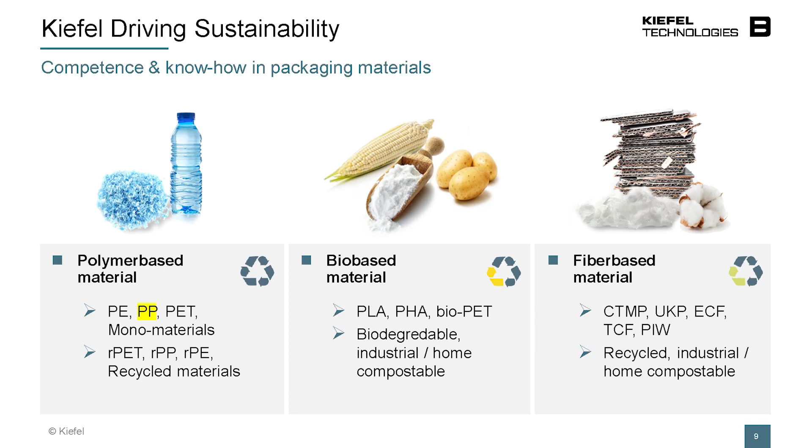Thomas Halles already touched these points, and this is where Kiefel wants to concentrate in the future: polymer-based materials, bio-based materials and fiber. For some of you, you have heard that Kiefel is going into fiber or went into fiber. For some of you, maybe it's new. So we will also learn about fiber.

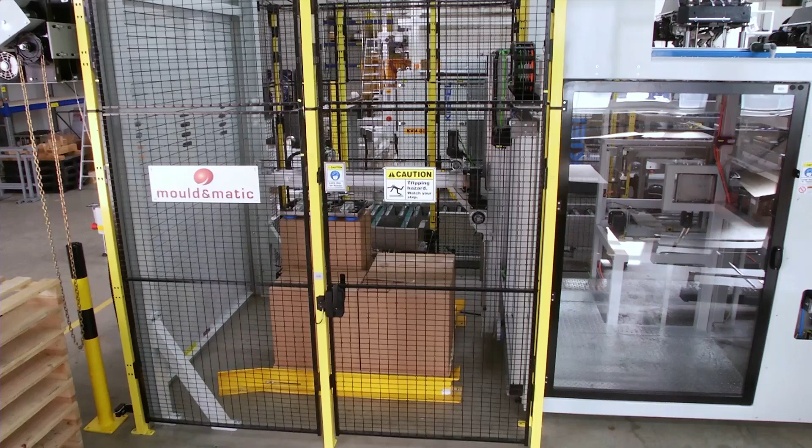So, I hope you enjoyed the short video showing the complete Kiefel turnkey system running a coffee capsule. And of course, you will have a question about is it really worth putting so much money in automation? I would say yes, I can answer that question, but of course, for every customer, you have to do your own return on investment calculation.

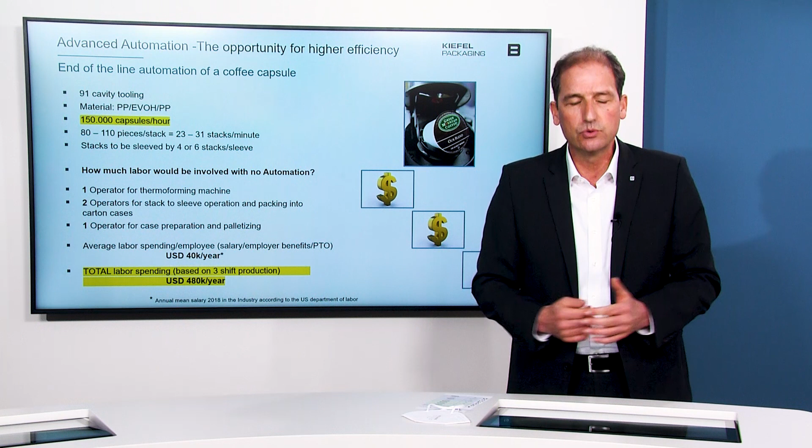This shows you an example. It's a 91 up cavity tool running 150,000 capsules an hour. And you would need about 4 additional operators in order to manually pack these products or these capsules. So overall, you are saving about 480,000, close to 500,000 US dollars with this investment.

So it is at least worthwhile looking into that solution to find out if it works for you or if it doesn't work. I'm sure it will work for you.

That was an example for a PP product. Now I want to touch PLA. PLA is a material that is around in the plastics industries for at least 20 years, I would say. Is it very popular in terms of volume? Probably no, but it is a very interesting material for certain applications. And looking into sustainability, you have to think about PLA and at least check if it is the best solution for your product.

Kiefel has done a project last year where we realized a cup line for a PLA cup, a drinking cup, rim-rolled drinking cup, 1 diameter and 5 different heights. So from 9 ounce to 24 ounce.

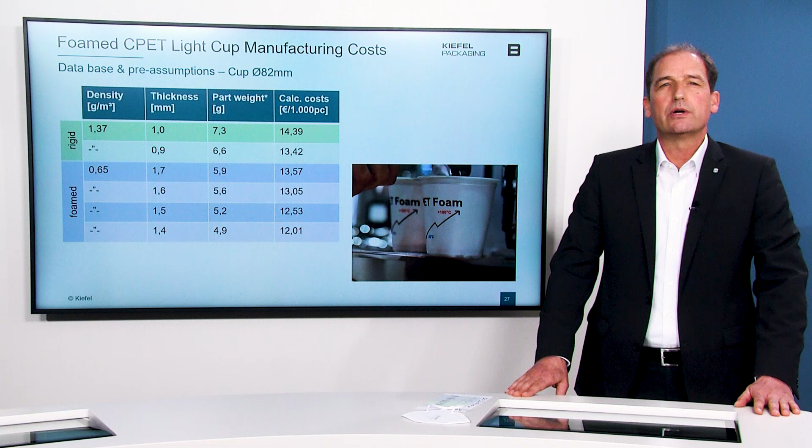I have calculated the costs for 1,000 pieces. And you can see clearly that from a film thickness of 1.6 millimeter, the foamed CPET makes most sense.

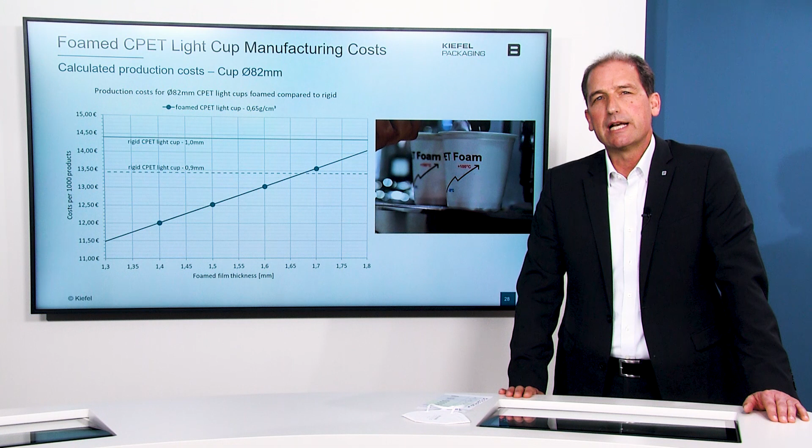Another slide also showing this. You can see the line where the foamed CPET is less expensive, and the more you minimize the width of that material, the more challenges it is getting.

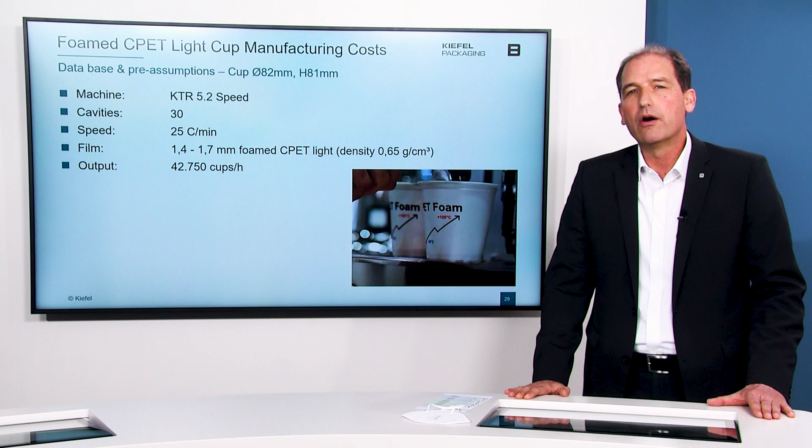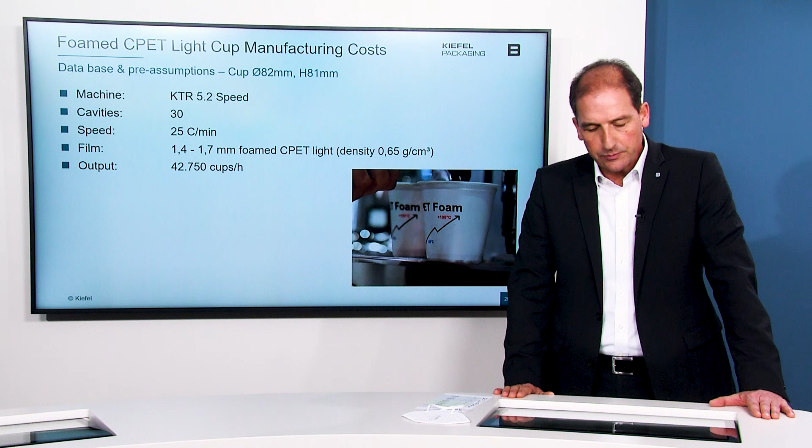What is the machine solution for that? We used the KTR 5.2 Speed machine in that case, with 30 cavities possible for that diameter, running 25 cycles. The 25 cycles are limited by the crystallization process, and there is no chance to go much faster. But the output of 42,000, almost 43,000, is I would say acceptable. Another product we have done, a different design, makes it a little bit more rigid with the design on the outside. In this case, a little bit bigger, 21 cavities, and the output is around 30,000.

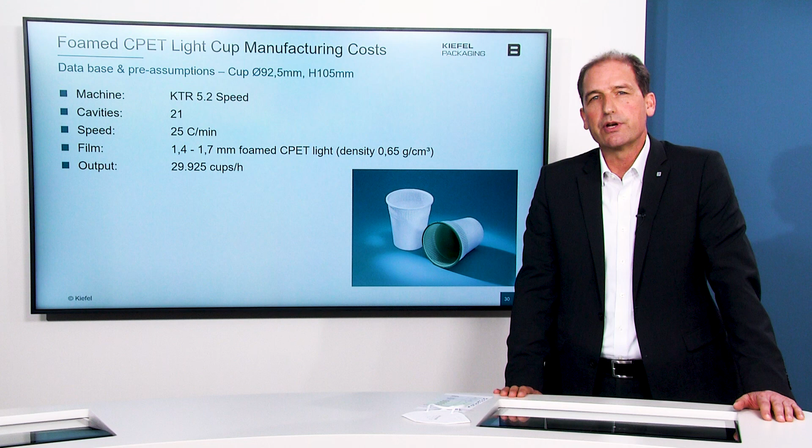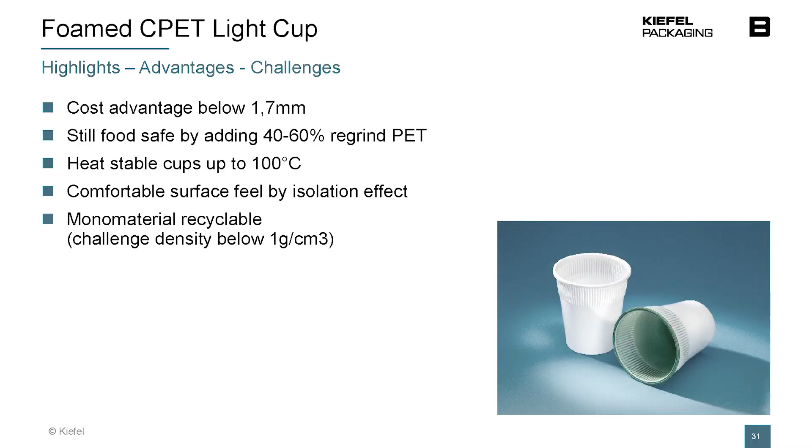And of course, there are highlights, advantages, and challenges in this product, I have to say. The biggest challenge, I would say, is getting to a film thickness where this material really makes sense and is less expensive than rigid PET.

It is a challenge to use PET regrind, but what we have seen so far, it is possible to go as high as 60%. A real advantage of that cup is that you can fill up hot coffee, hot tea, hot materials, and the feel outside is great. It is almost cold, and it has a really nice touch to it.

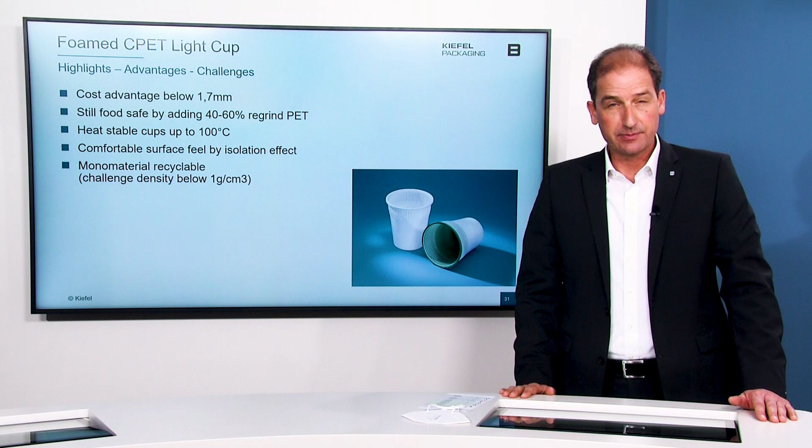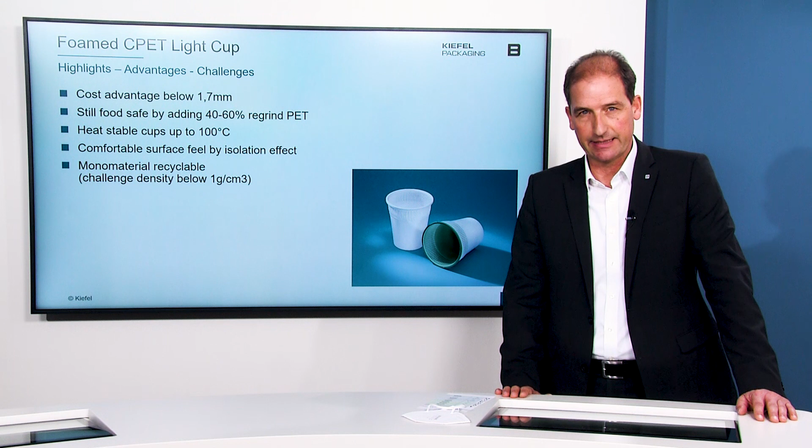And again, as we talk about sustainability, this is a monomaterial and can be recycled. The challenge in recycling, of course, is density. But there will be solutions in the future.

So, I mentioned before the KTR 5.2 Speed machine. Let's have a look at a nice video and see what this machine is all about. Yeah, let's have a look at the video.

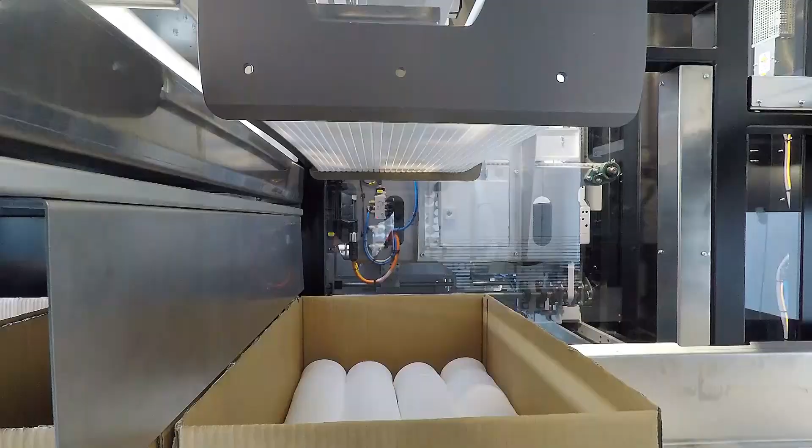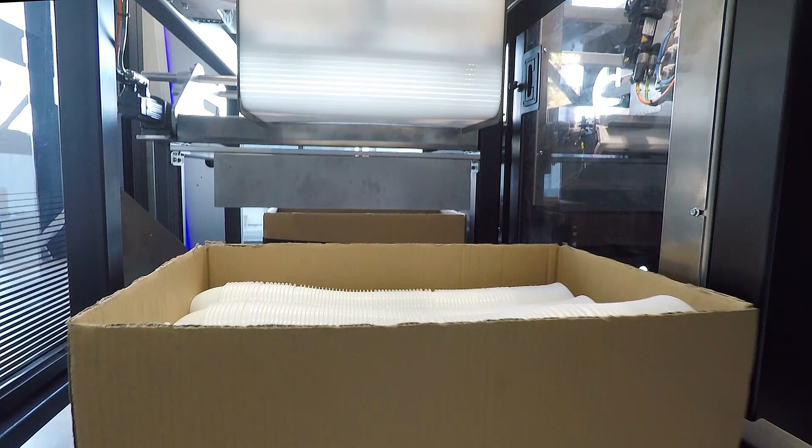Yeah, that was a nice machine, right?

I guess you could realize that there is no blue color anymore. So we have a new design for the .2 generation on the KTR side and also on the KMD side. KMD we will see later.

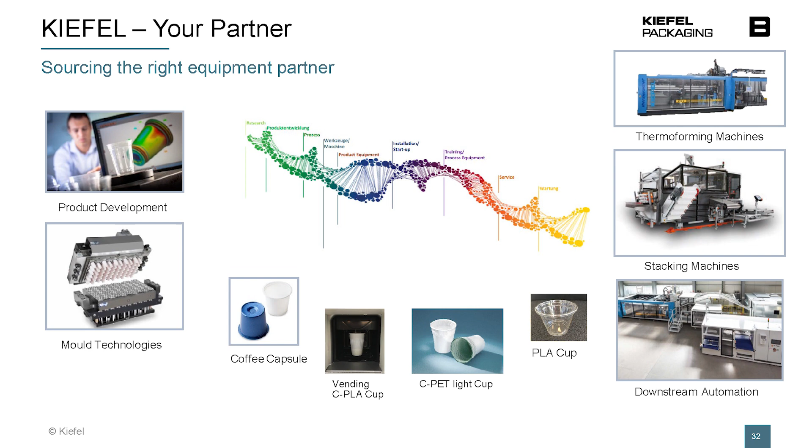And a real highlight on the .2 generation is the new HMI. For details, get in contact with us and we will look into that with you together and find out what you need and what we can offer.

So, at the end, I would like to summarize what Kiefel can offer. I started my presentation with a lot of changes. I think right now Kiefel has developed into a turnkey provider, and as you can see with this picture, we can offer tooling, we can offer machines, we can offer automation.

So for all kinds of different products, which are, if we talk about coffee capsules, not easy to make. If we talk about other products like the PLA cup, it's also not easy to process. So we are able to help you. And I would really ask you to get in touch with us and discuss the project and go deep into the technology and the solutions we can offer.

I also have to mention that we are still open. Kiefel will also offer a tool to a non-Kiefel-made machine. We will also offer automation for any kind of thermoformer in the field. So we are still open. We love to make turnkey, but we also can offer single tools, single automation, whatever is required.

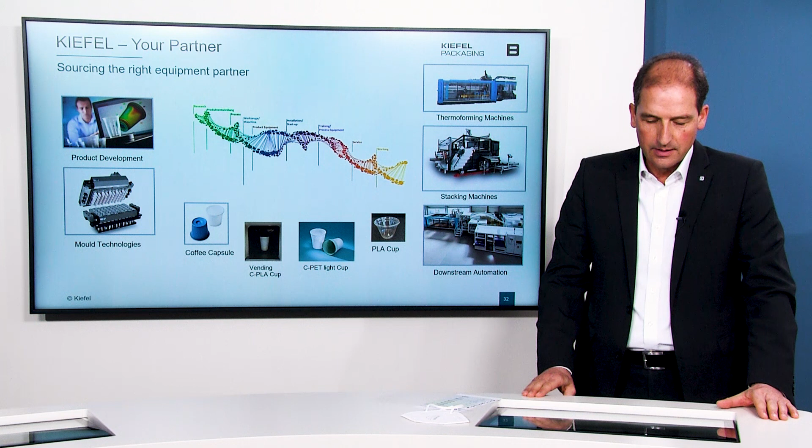So now it's time to welcome Alex, my colleague. Hello, Thomas. Hello, thank you Alex. Good to see you. Very nice presentation. Thank you. Congratulations. Thank you. Thanks.

Thank you very much. Thank you, Thomas. Thank you, Thomas.

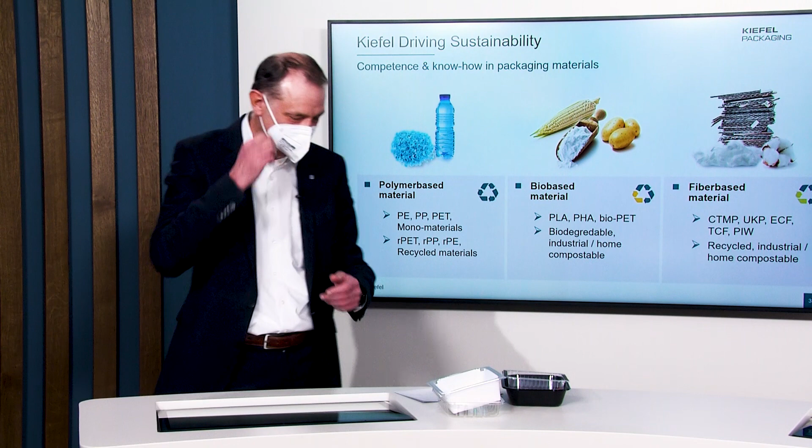Yes, ladies and gentlemen, good morning and welcome to our webinar. My pleasure today is to talk about some trends and innovations in the packaging field at Kiefel, especially dedicated to our steel rule cutting machines, our KMD series.

In one of our last webinars, I was talking about Bob the Builder with his famous 'Yes, we can' phrase. Today I have chosen Charles Boss Kettering. He was, well, the colleagues from the United States know him far better than me. A US-American scientist and also businessman working with General Motors, holder of 186 patents. And well, what he said, if you have always done it that way, it is probably wrong, something that I would agree on. And another interesting phrase is, my interest is in the future because I'm going to spend the rest of my life there. And with this phrase, I completely agree.

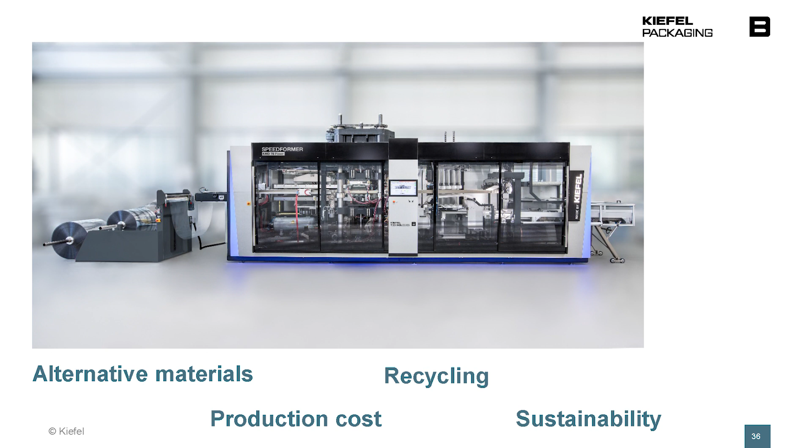And I think nowadays, every day more people are aware of this, and this is also driving the latest discussions if we take a look into the thermoforming business. As Thomas mentioned already on his slides, we have alternative materials, we have recycling, we have sustainability, and a traditional topic as well, like production costs. Currently we also have this pandemic COVID-19 issue on top.

This is the opportunity to say sorry for my haircut. It's been quite a while, 3 months ago.

Sorry for that. So how can we handle these topics? Let me give you some ideas about that, what it means in detail. For instance, the target of retailers and brand owners is that packaging should be recyclable, reusable, or compostable.

So I picked out some examples, like Aldi in Germany, Lidl the same, gradually reducing the use of plastic material in the packaging. Kaufland's packaging of meat from self-service should become a box just lined with a thin plastic foil.

On top of that, we have bans. Thomas was talking about the ban of EPS, so we have to look for alternatives to the foamed polystyrene. We have in different countries, in different regions even, laws requiring products that are banned or that should be completely made out of recycled material or with a certain amount of recycled material. So it is a challenge nowadays to fulfill all those requirements, and it's different in every part of the world.

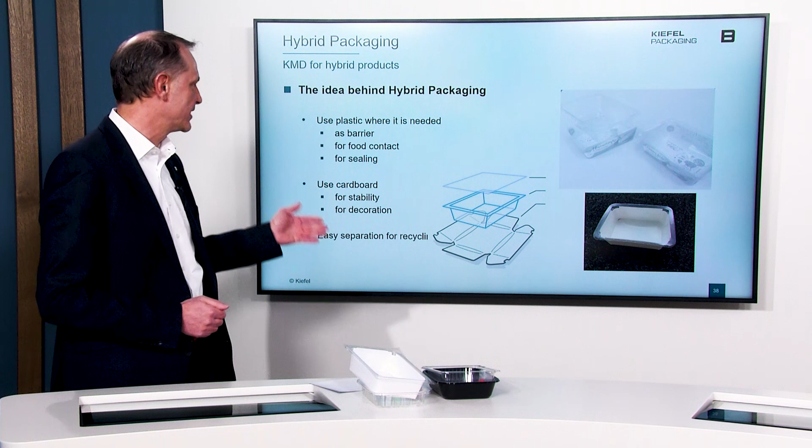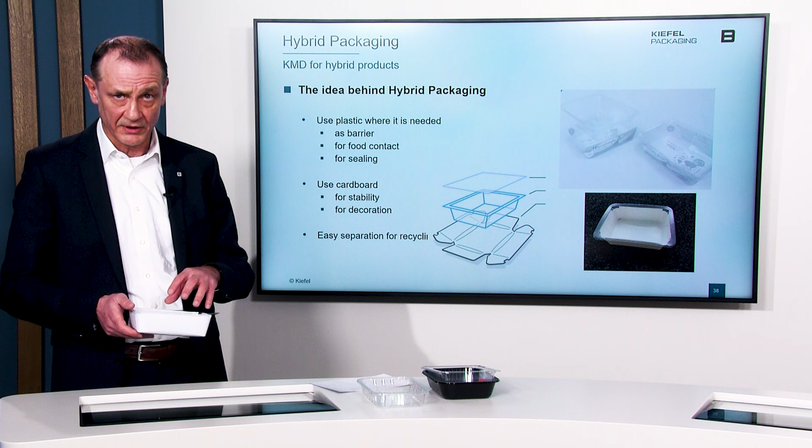One idea is the hybrid packaging. Kaufland, for instance, uses this kind of product. The idea behind it is to use the plastic just where it is needed, as a barrier for food contact and for sealing, with the cardboard outside for stability of the product and for decoration. The idea is to have the possibility to easily separate the plastic part from the cardboard and put it into different boxes or systems for recyclability.

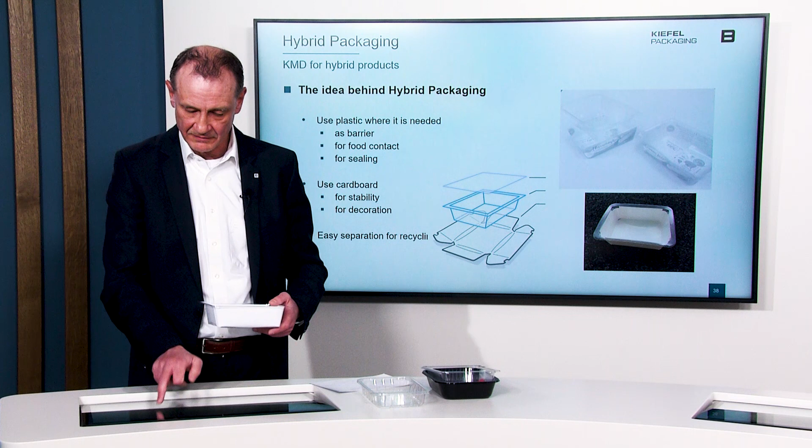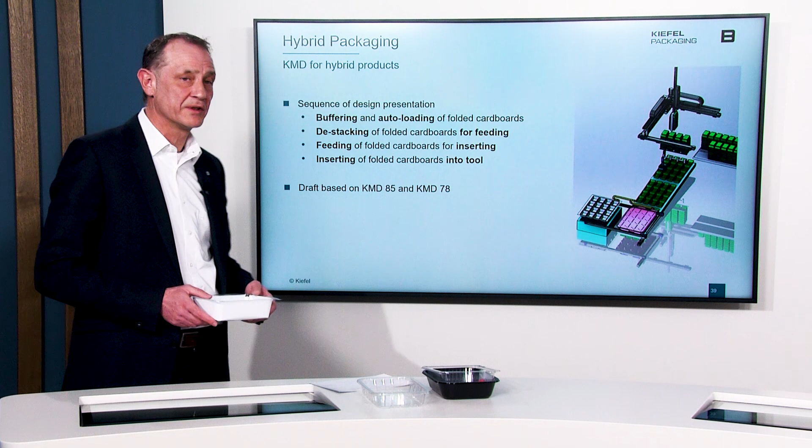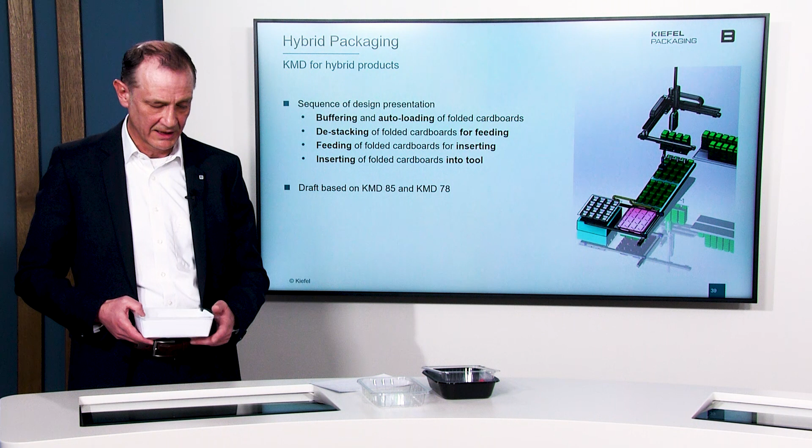How does it work? This picture shows the idea to buffer and autoload the folded cardboards, destacking them for feeding, for inserting and loading them into the lower tool of the thermoforming station. This draft is based on and available for our machines KMD 78 and KMD 85 size.

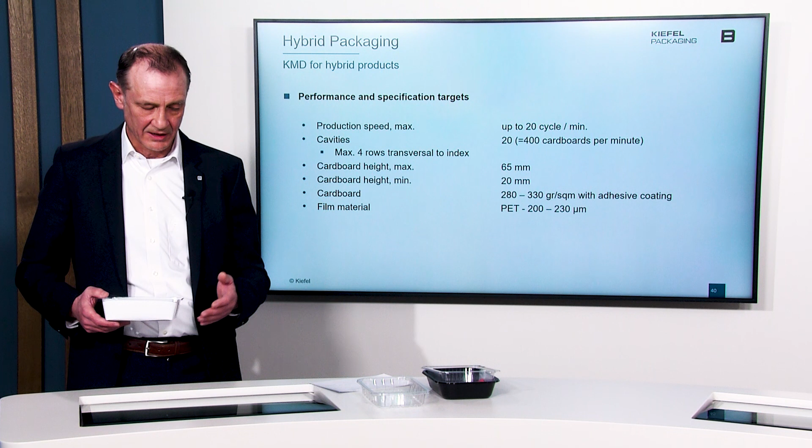Some ideas about the performance: production speed maximum up to 20 cycles per minute, 400 cardboard and 20 cavities per minute, 4 rows maximum transversally, and the idea is to use PET. For PP, it still has to be determined.

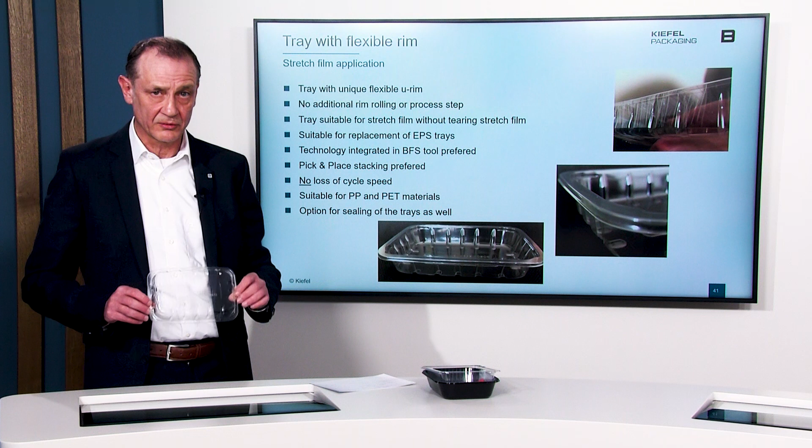Another product showing an alternative to EPS products, typically for the packing of chicken, fish, or meat, is the so-called flex rim design of a tray. I hope you can see it on the pictures as well. It is a traditional forming and trimming process in the same station, our so-called BFS system, a special tool developed by our colleagues from Kiefel Packaging in the Netherlands. The flex rim technology is integrated into the tool, so existing machines can be used.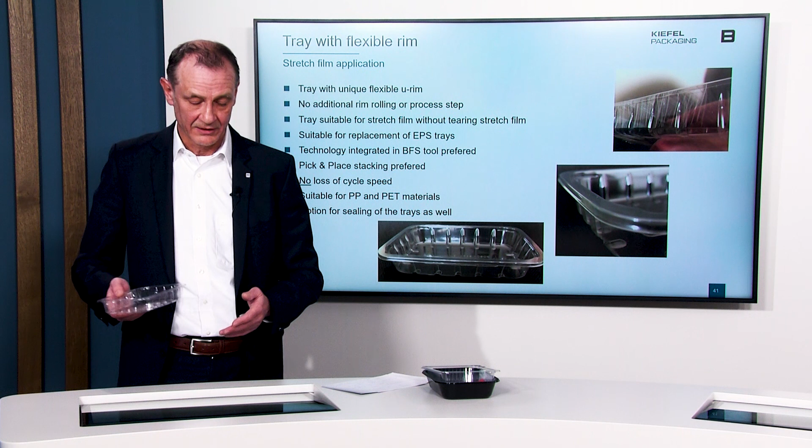Pick and place is preferred for the stacking of the product. The cycle time is quite nice, so you have no loss of cycle time compared to a classical rim design of the product. It's suitable for polypropylene and for PET materials as well, with an option for sealing available, of course. So a nice idea to replace EPS.

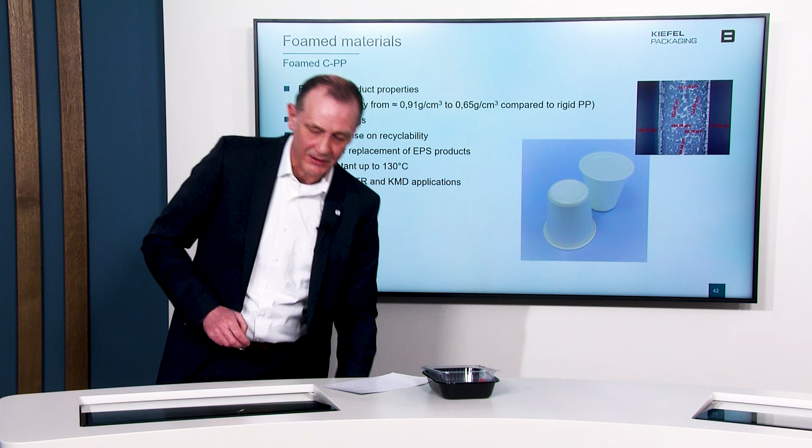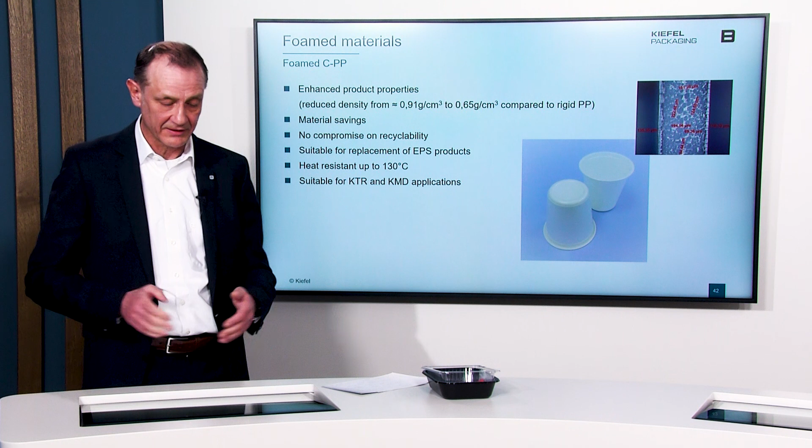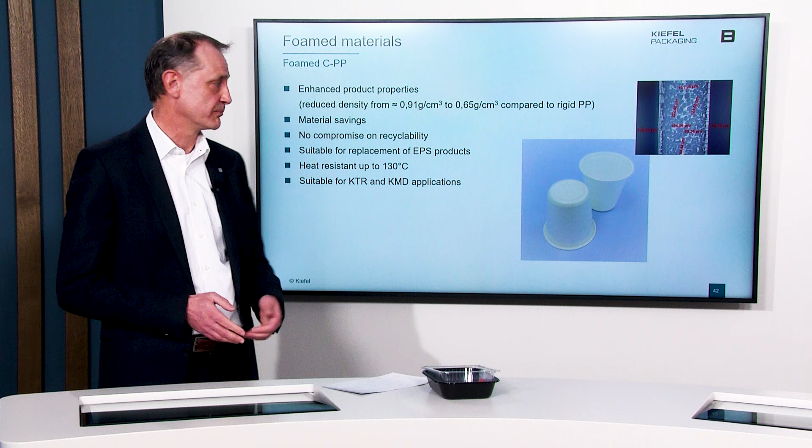Thomas was talking about some kinds of materials like foamed PET, foamed CPET. To complete this, I would also like to talk about foamed PP with a different density, reducing it from 0.91 to 0.65 compared to a rigid polypropylene. The idea behind this is very simple: it's material saving, to reduce the weight, and this is what the retailers are talking about, to reduce the usage or the weight of the plastic packaging. This fulfills that perfectly.

And by the way, it's heat resistant up to 130 degrees centigrade, suitable for KTR and also for KMD applications if needed.

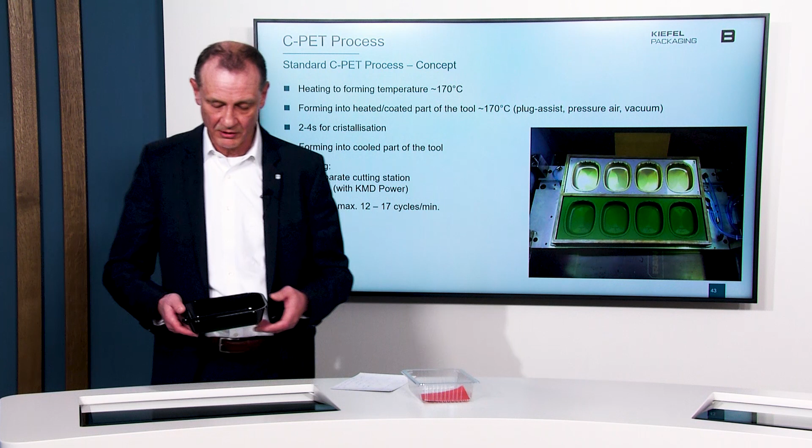Next topic I want to talk to you about is the CPET process. CPET is a very well-known product, typically used for ready meals, pizza trays, and also for cake, for instance. You can put this product into a classical oven, and it is heat resistant up to 200 degrees centigrade. I would like to share a picture with you showing the typical process with a divided tool, so classically you have a divided forming area.

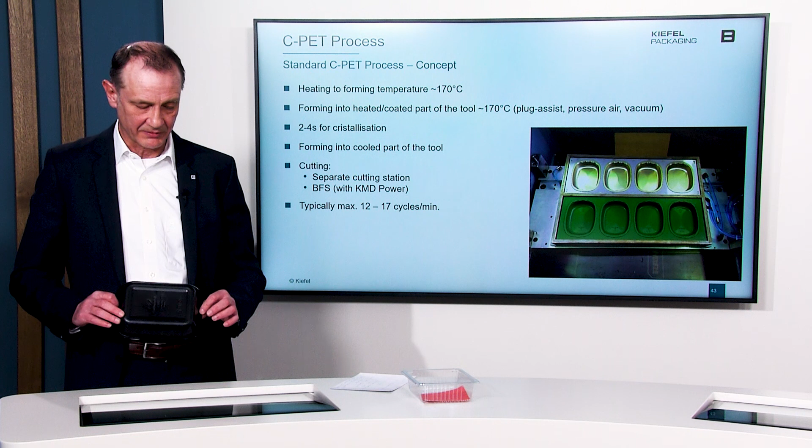The first part of the tool is hot, something like 170 degrees, and the second part is cold, or cool. In this combined tool we are typically forming CPET products, and the production time is 12 to 17 cycles per minute, which is not so fast, but for the crystallization it was so far not possible to do it in a different way.

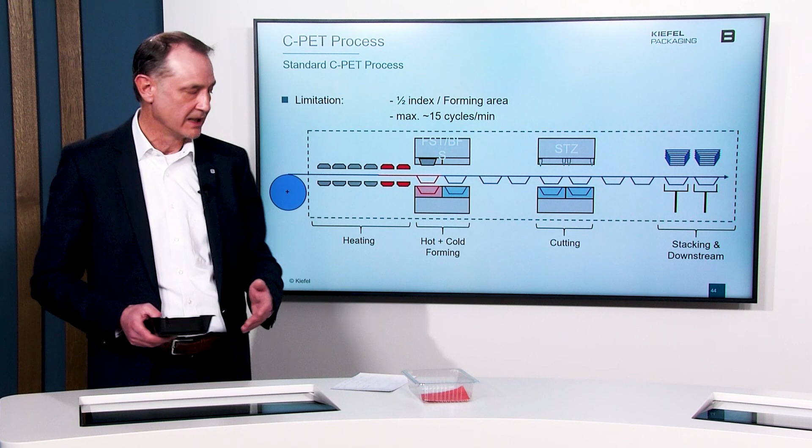This is a picture showing this process as described already, so just half of the forming area is available, and then the cutting and the stacking.

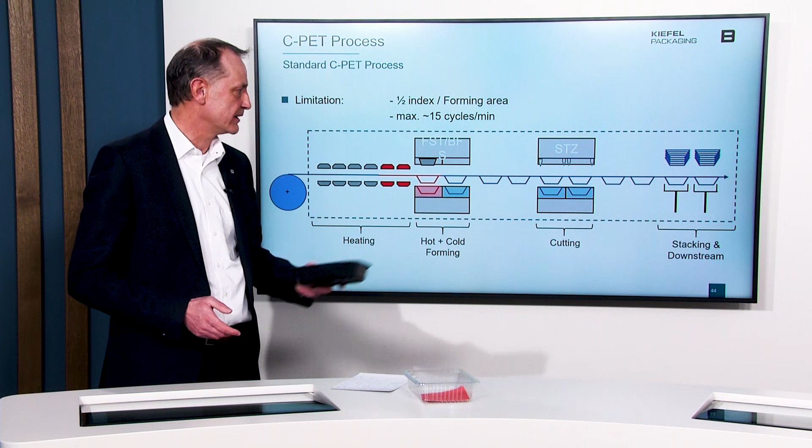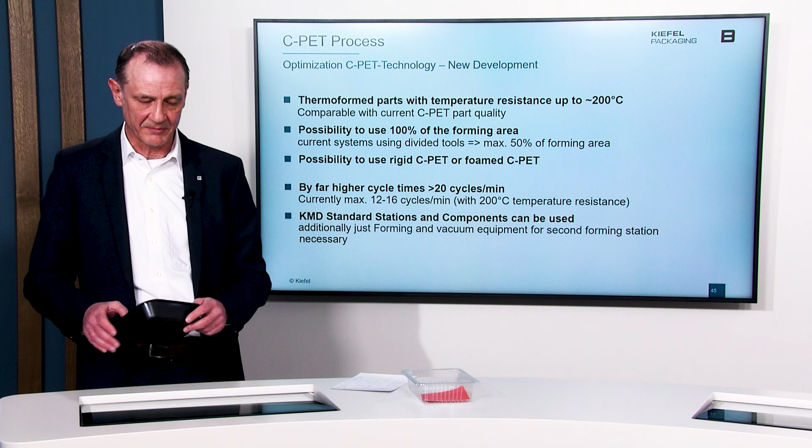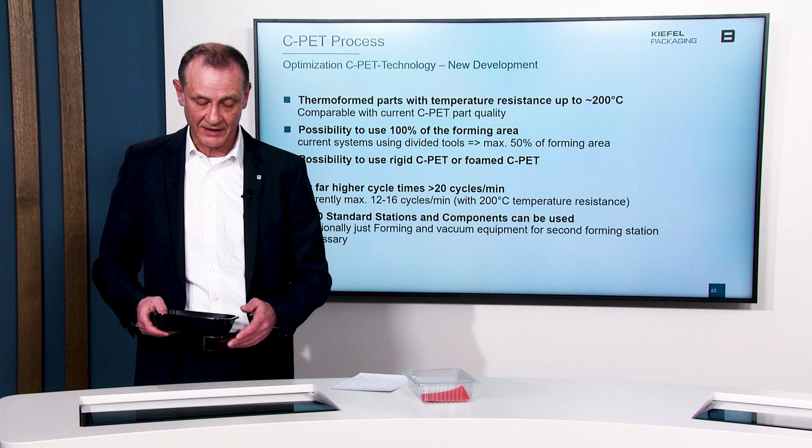Currently Kiefel is working on a completely new development, a new process for CPET, with the possibility to use 100% of the forming area and to have a typical classical machine configuration with 2 BFS stations to drastically increase the output of the CPET products out of the machine. So we are talking about cycle times higher than 20.

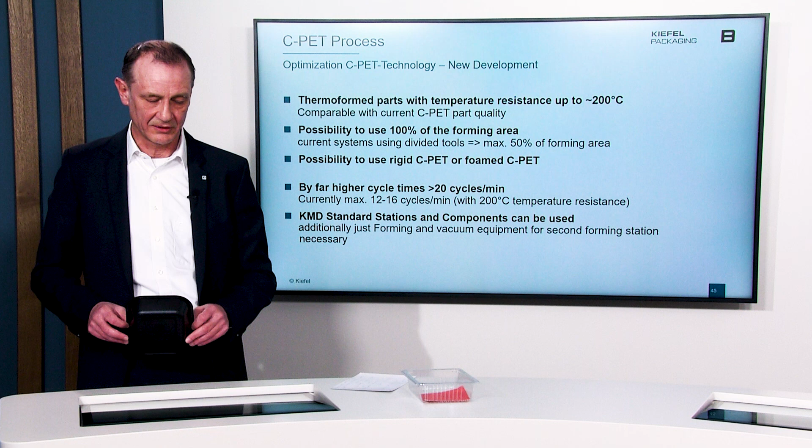Currently, as I said, 12 to 16. And all standard components of a KMD can be used. I do not want to show more technical details, but feel free to contact and ask us, and let's talk about CPET.

It's a fully integrated solution. The pads or the setting of the padder can be done via the main HMI of the KMD machine. It's very powerful, so you can operate the KMD with up to 40 cycles per minute. And it's one master roll, so we have the transversal cut, the cross cut, splicing, and an optimum of roll utilization.

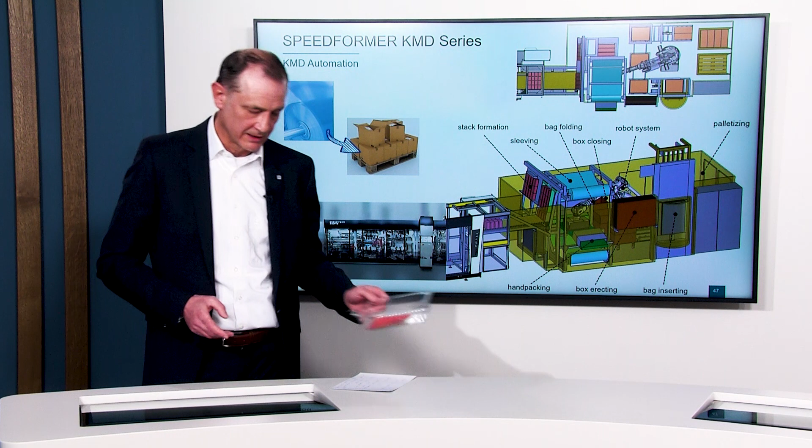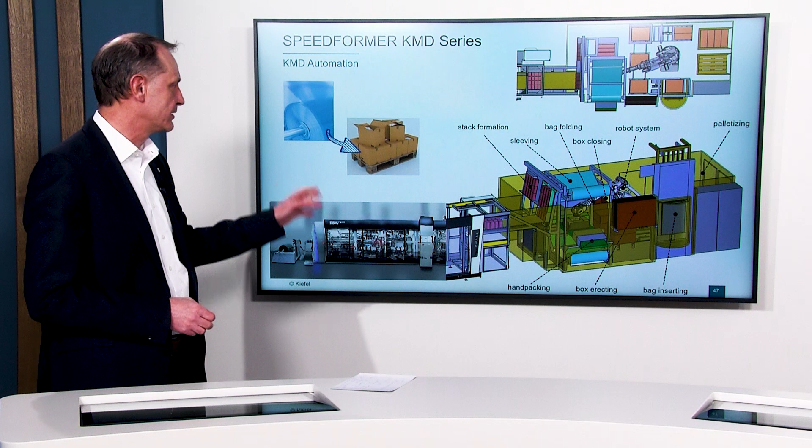To finish this automation topic, this is something developed together with our colleagues from Kiefel Packaging in Austria. It is an automation system. This picture shows a little bit the idea behind it, as Thomas mentioned, to reduce the number of operators, to have a modular system with the possibility to have a stack formation, to add a sleever, a bag folding, box closing, robot system, palletizing. So all this is available.

The idea is to have this in a kind of modular system and to choose what is necessary for your production and to fulfill completely your needs. So automation is always something we have to watch in detail. Please feel free to contact us, ask us, and we are happy to help you.

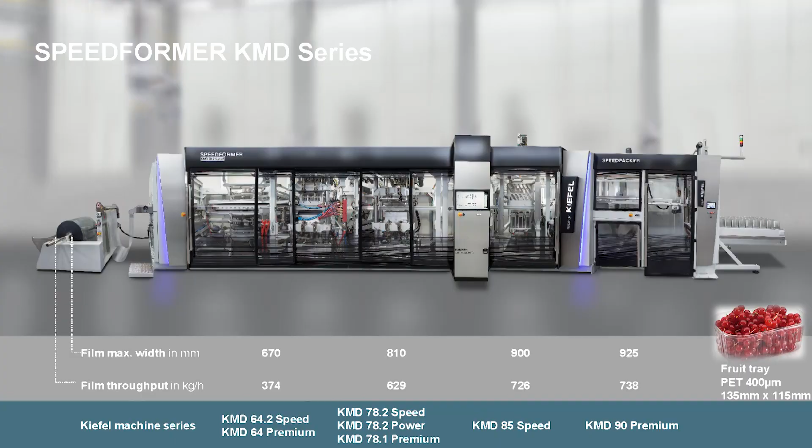My last slide is to give you an overview about the Kiefel portfolio of our KMD machines. So the different film widths, the different machine models, and I added, based on a fruit tray made out of PET, 400 microns, the machine capacity. For instance, KMD 78 machine size, more than 600 kilograms per hour is the throughput of the machine, which is quite an impressive production, I would say.

The next slide would be not a slide, but a video. I would like to show you a KMD 78.2 speed machine in a classical configuration with a forming station, cutting station and stacking station. Please watch it, and for any doubts, please feel free to contact us anytime.

Stay tuned, please, because afterwards Richard Hagenauer, our fiber expert, will go with you more into details about our fiber machine line which is available.

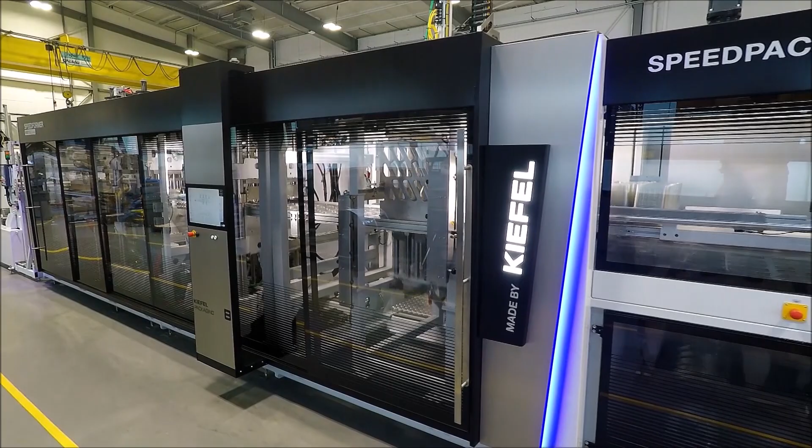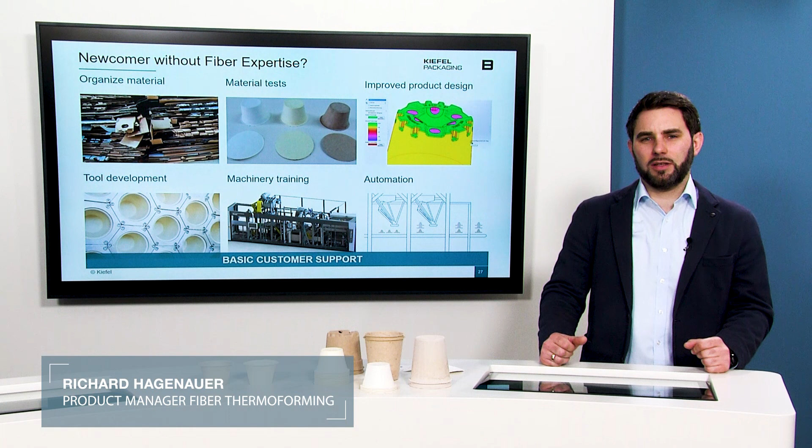According to our Kiefel DNA, we like to accompany you from the beginning of the project till your expertise in fiber molding. So don't worry if you're a newcomer in fiber molding and do not have any expertise. Kiefel provides a huge network for fiber products and additives, so we can help you out with material for the first tests and to get familiar.

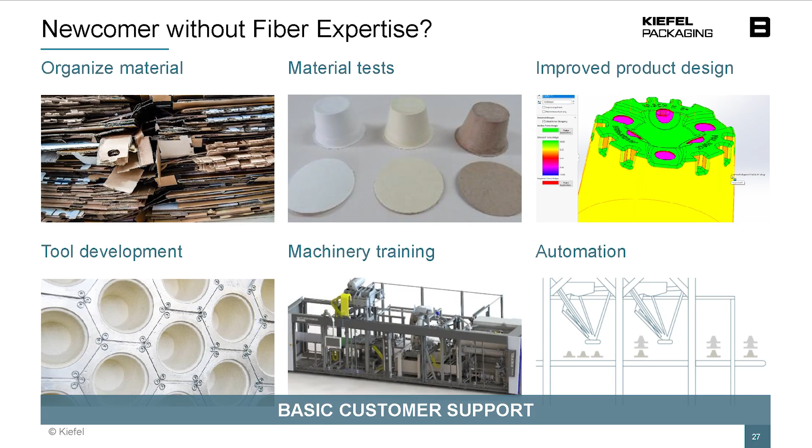These material tests could help you find the right mixture and the right design for your products, because design is very important for fiber molded products. Particularly if you come from plastics, you need to rethink the design of the product. This is very important for a stable process.

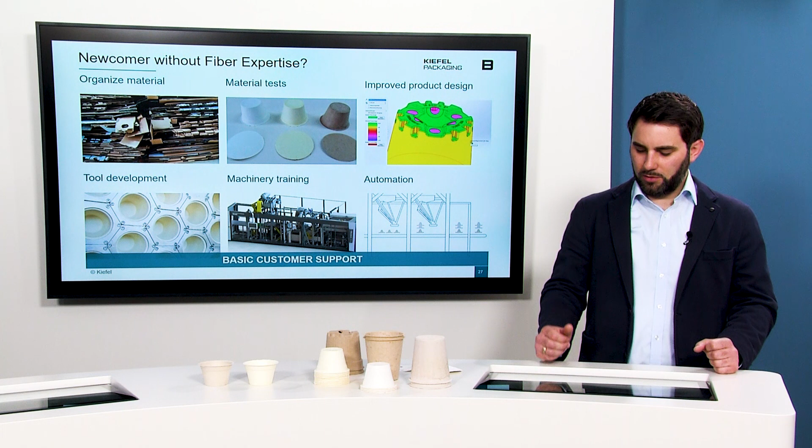Also, the tooling itself is very important, and together with you we will find the best approach for your tooling. For the machinery, we can provide many drawings and charts to get familiar with the machine very quickly. By the time you get the machine into your plant, we can support your staff with training. Later on you will hear more about automation, but sometimes we should discuss it at the beginning of the project.

If you're already an expert in fiber molding, we can skip a few things at the beginning of the project and should discuss the right fiber preparation. Kiefel offers a wide range of fiber preparation. In our portfolio we have a small one for R&D, a mid-size one, and also a tailor-made system which could be brought to the highest level, and this is really modular.

We can also do real samples on a single cavity tool, for example, to acquire new customers and to make tests together with plastic lids, or just to feel the product, the trays and the cups.

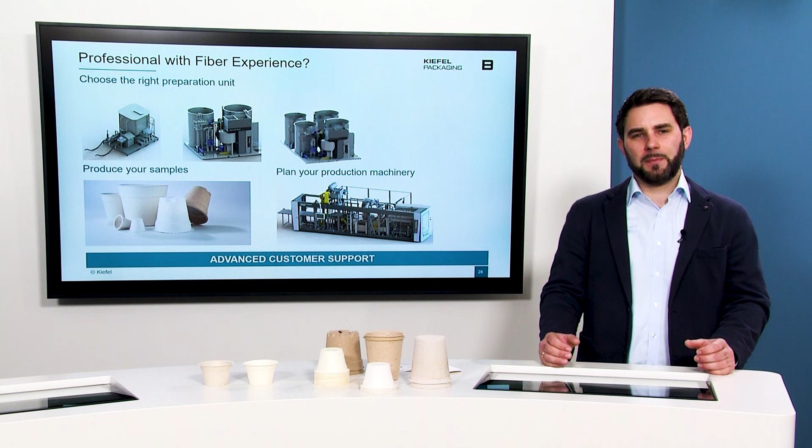If you'd like to plan your production in a new plant, for example, we can provide a lot of information. We can support you with calculations of input and output, meaning electricity and products per day, for example. Just ask us.

As you can see, we are able to make samples in a small size, in a small range, and we are also able to make samples with a higher dimension and a higher quantity. I will show you some tests later on.

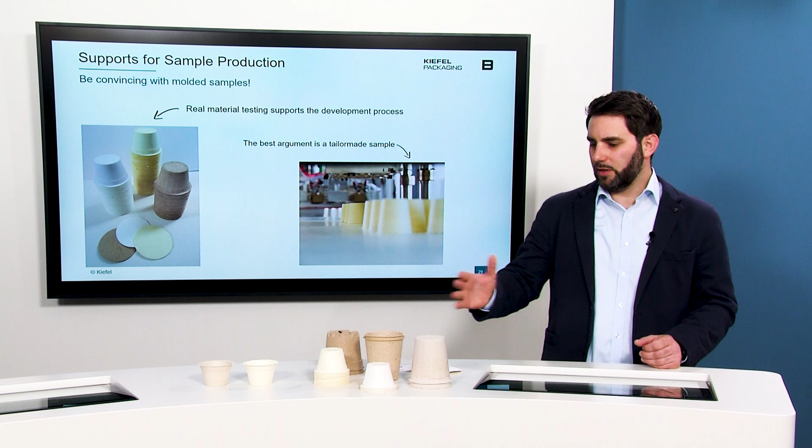I'd like to do a live demonstration for you, because many times we are asked about the water resistance of products and the oil and grease barriers. Some vegetable oil. Later on we will have a look again at these products, and we will see they will keep the liquids inside.

A more obvious test of sizing, to see if the sizing works well, is to make simple discs and test the material combination and the combination with additives. If you put in blue ink and you have no sizing, you will see the ink is fully soaked in, and you will see it also on the back. If the material is already sized with some chemicals, it's a smaller point of the same drop of ink, and on the back you won't see any ink.

Sure, we can do a Cobb-Unger test in the laboratory, but this is a simple approach. You can do it also on your machine during production to control the output.

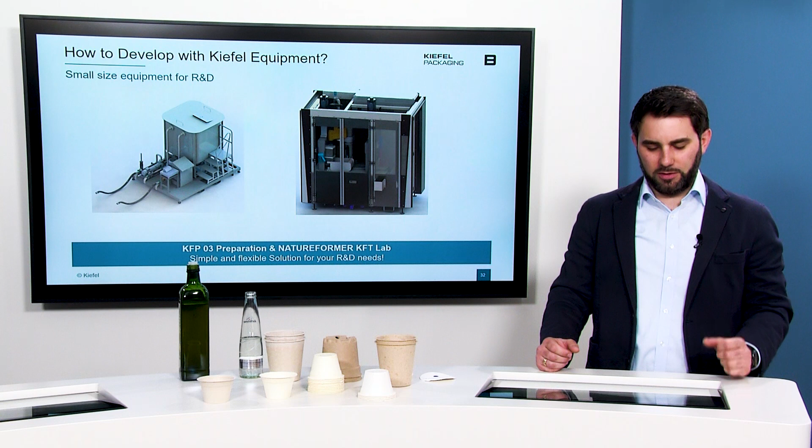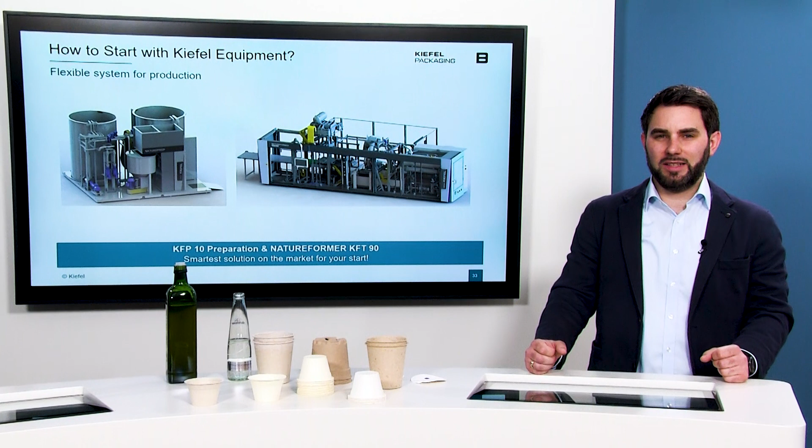Of course, we provide the best and the suitable preparation unit, called KFP3. Our typical machines are the NATUREFORMER KFT 90 and Flex and Speed, and these machines could be combined with our KFP10. This is the best setup for initiating a production. So you can buy one KFP10 and the NATUREFORMER, and later on you can add more nature formers to increase your output.

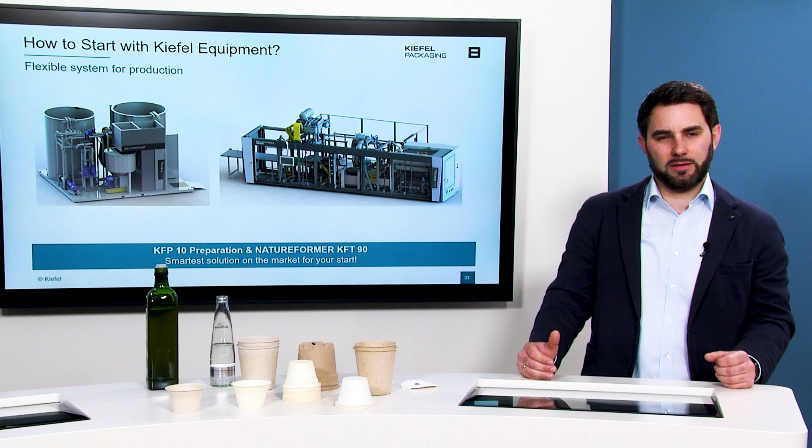If you're thinking already in huge numbers, for example planning a new plant, we should think about a cluster of 4 machines and a tailor-made preparation unit. As mentioned before, this tailor-made preparation unit could be done by modulars, or could be completed by different systems - refining, additives and some other equipment - and helps you achieve the maximum output.

So, ladies and gentlemen, we hope that you found something interesting for you and that you can take away some solutions for you and your future. But we kindly ask you to discuss with us the packaging trends so that we can really create potential for you and your company. Let's discuss your specific solution with regard to sustainability, and let's work on design, functionality and materials, so that we can create a good future for you and your company and for the next generations.